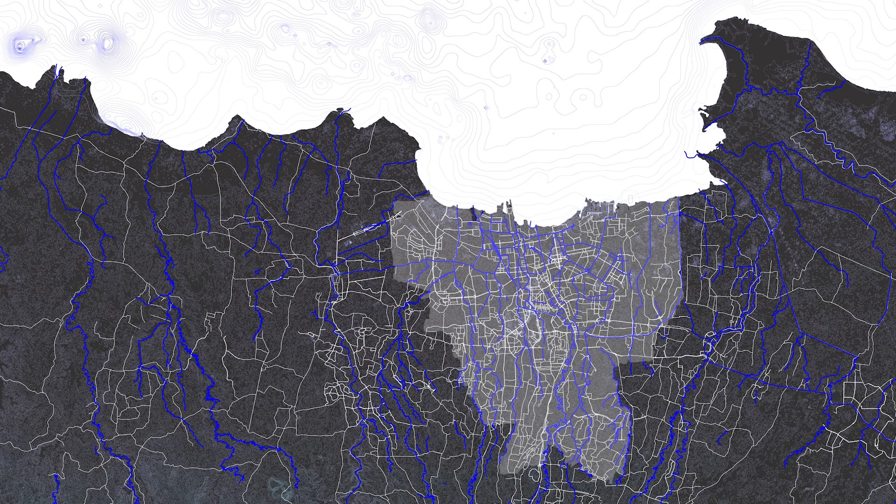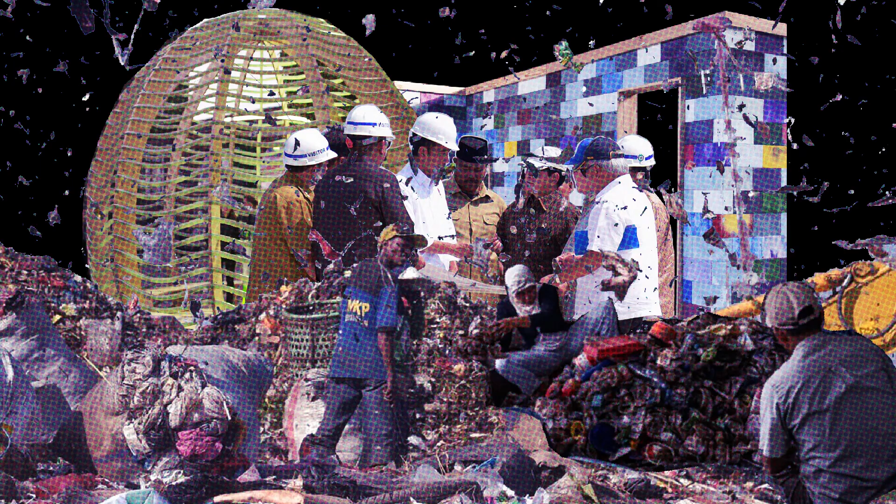Concurrently, the constant rising sea level has forced the government to move the sinking capital to the neighboring island of Borneo, leaving behind the most marginalized poor in the sinking capital. With millions of its residents in danger, the government has no choice but to accept the new proposal of building a new micro-city stemming from the old capital.

This micro-city is based on 4 ecosystems. Firstly, recycling as the main building block for the community, as well as its primary source of energy. Next, algae is used for the production of clean water and air. For food sustainability, aquaculture and hydroponics are used. Finally, the housing ecosystem, making it a livable society.

Using the distinctive layers of the existing city, a site analysis was performed to determine the suitability of different areas within the site. From this, the areas where the ecosystems are to be anchored onto were determined. These main anchor points are then used to generate a mesh that allows for flexible yet controlled growth of each ecosystem. The various elements are entirely connected, forming a closed-loop ecosystem, where the recycled waste is then used for building the main infrastructure system.

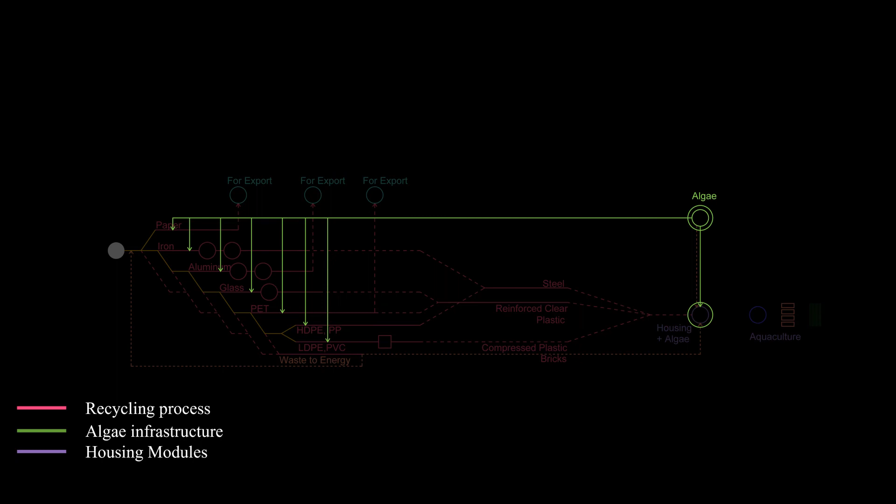The algae ecosystem acts as a mediating element as it cleans and processes the wastewater for daily use. The main recycling processes are represented in pink, forming the base of the ecosystem, leading to the yellow zones where the upcycling happens. The green represents the microalgae infrastructure for production of clean water and biofuel. The housing grid is located between each of these algae spines, where living spaces and aquaculture intertwine.

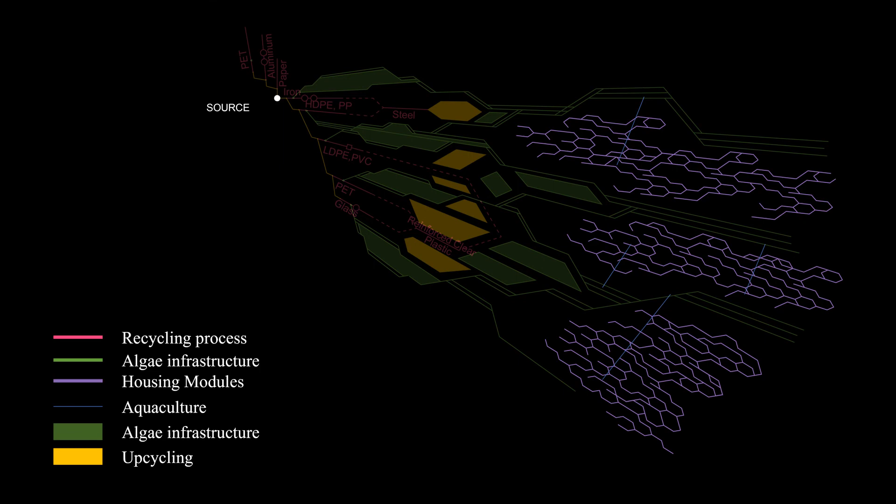2030. The capital has moved, leaving behind the poorest of the poor. In the first phase, the recycling facilities will be set up together with the microalgae infrastructure. This makes up the base groundwork for the community to grow.

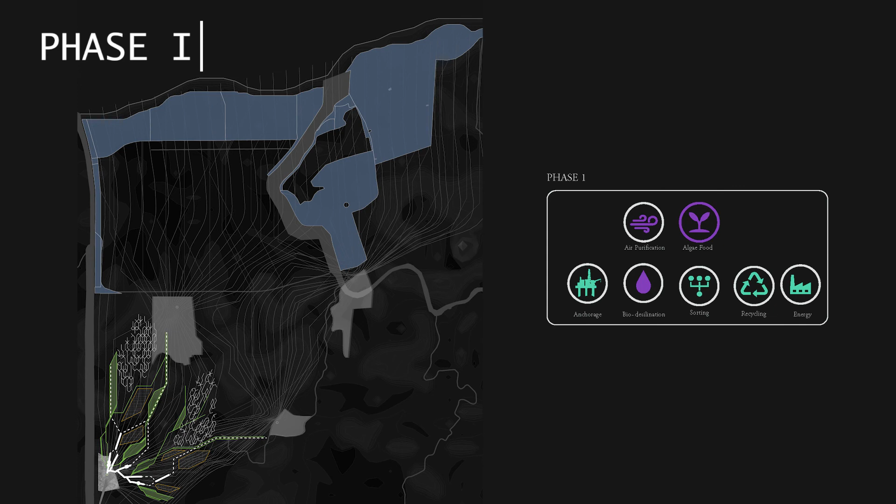Concurrently, the city will start to clear up areas closest to the coastlines as the threat of rising sea levels encroaches. The waste material generated within the area will be brought closer inland into 3 main waste consolidation zones.

2050. In the second phase, sea levels will begin creeping further inland, and the waste consolidation zones will start accumulating. New ecosystems will then start to grow from the waste consolidation zones. At the same time, areas within the vicinity will be torn down, generating resources for more communities to form.

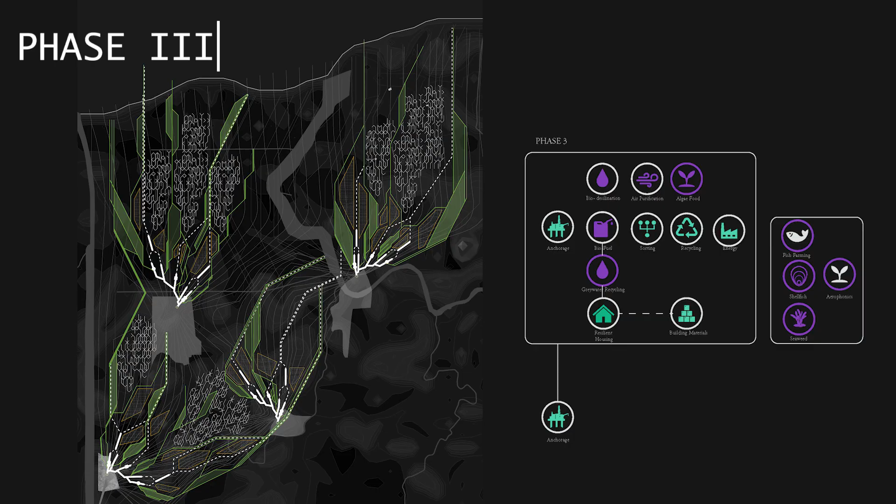2080. As more communities start to join, clusters will start to grow from the waste consolidation sites within this area. As the farming communities rejoin the housing clusters, aquaculture will thrive yet again.

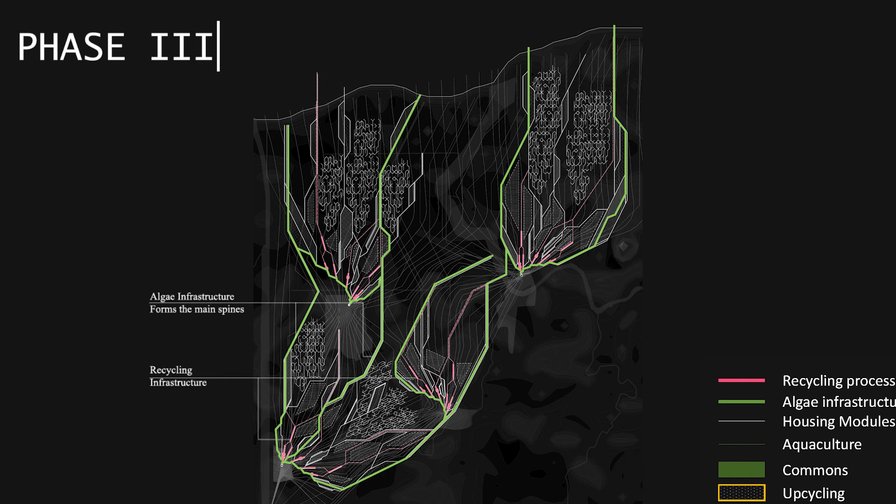Each of the communities will be further connected as the main algae infrastructure housing the commons continues growing. This algae infrastructure forms the main highways of connection within the site, steadily forming an interconnected network of different systems as the community starts reclaiming the area that has now been lost to the sea.

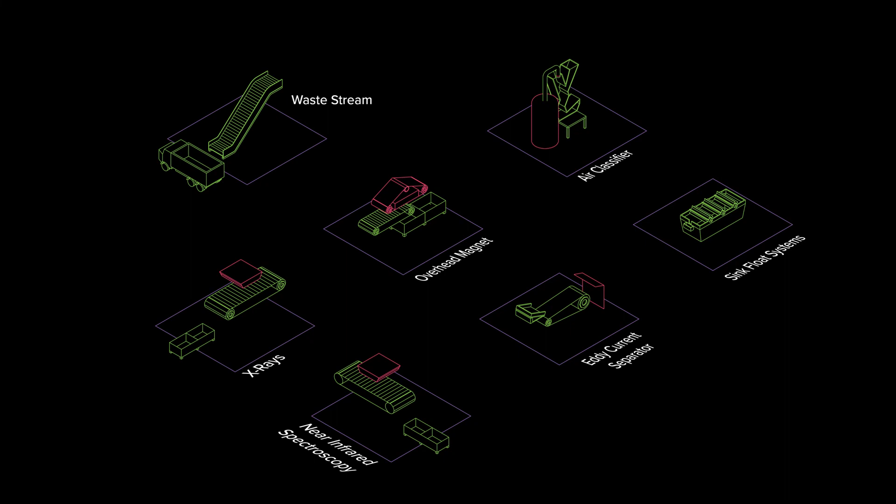Waste sorting. The heart of this project is the sorting process, where waste is sorted into its base components through sophisticated processes. These processes are strategically linked to allow for effective sorting of materials. A combination of sorting and recycling processes allow for the waste to be sorted and recycled into main components, ready to be used as raw materials.

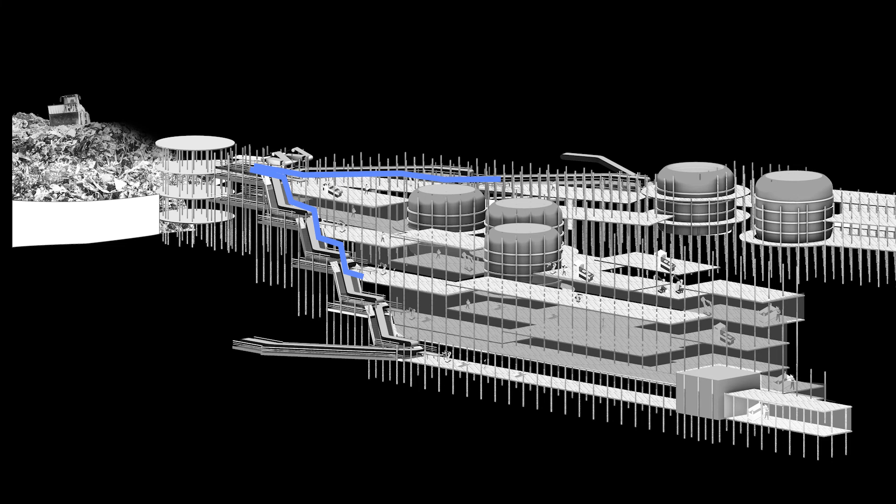This cascading infrastructure allows for the waste to be sorted efficiently, as they are directly channeled to the respective recycling systems, funneling the waste downstream.

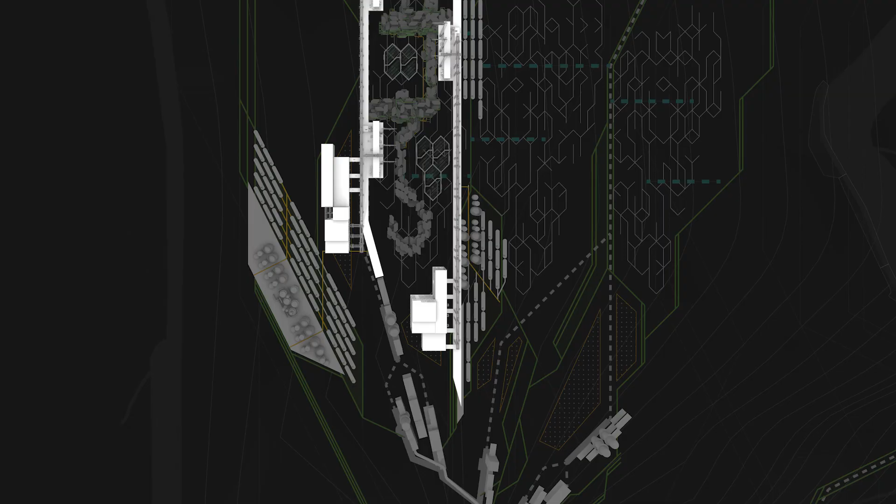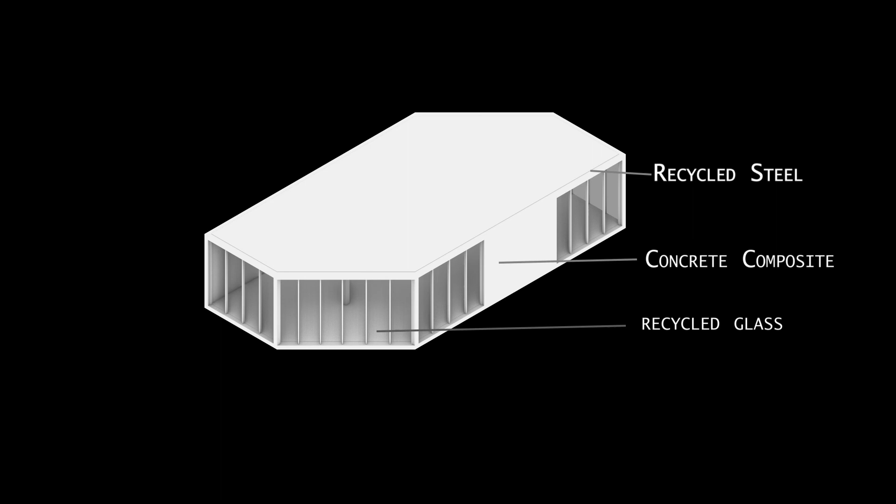Upcycling. The upcycling consists of three main upcycling plants: the steel upcycling plant, the glass upcycling plant, and the composite recycling plant. The materials made are then transported to temporary assemblage modules where base infrastructures are built. Each building block is made up of three predominant materials: the base structure made of concrete composite, recycled steel, and glass.

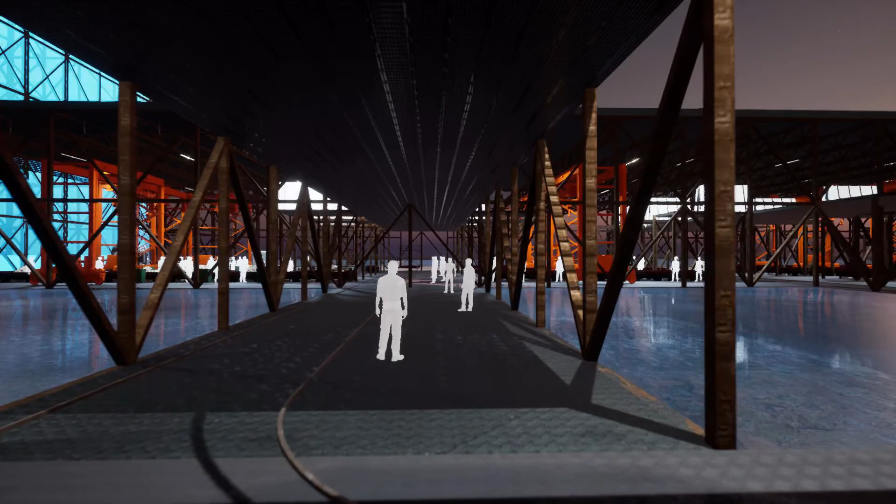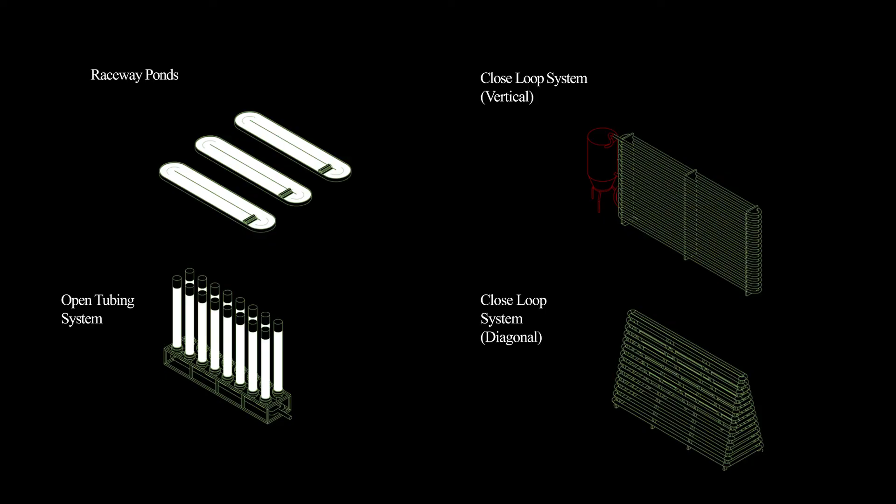Algae infrastructure. The algae infrastructure acts as a bridge between the productive systems and the living quarters. Different algae cultivation systems are deployed to cater to the specific needs within the ecosystem. The algae infrastructure consists of three fundamental systems.

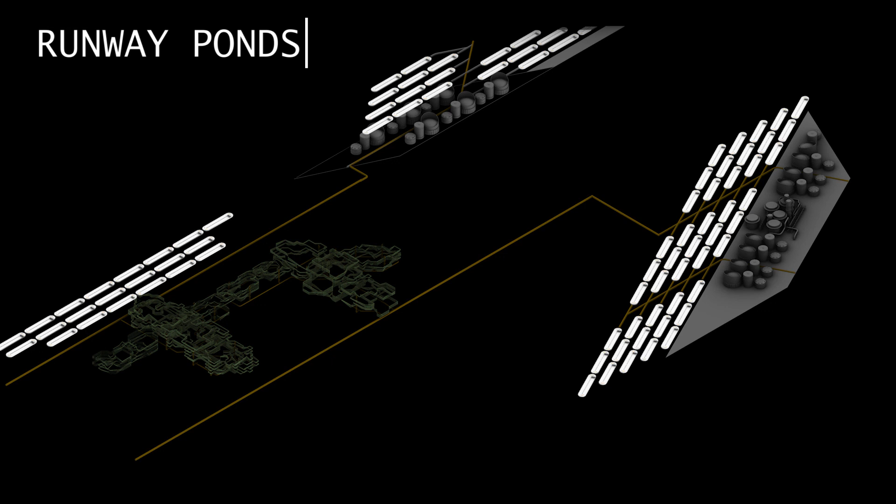1. The algae runway ponds. 2. The algae closed-loop system. 3. Algae processing system. The runway ponds serve as a base cultivation where seawater is desalinated to produce clean water for use within the productive system.

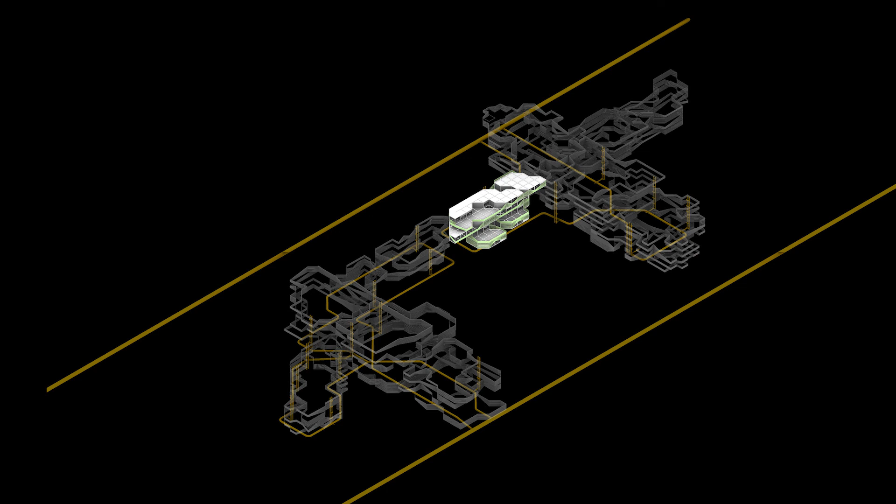The closed-loop algae system is designed based on the volumetric need of each living cluster, where all the loops are connected back into the main algae system. Each loop caters to one living cluster where grey water collected will be processed by the microalgae before it is reintroduced. All the different systems are linked together through the processing plants.

Each processing plant houses a research center where algae technology is researched and developed. One example is the upcycling of byproducts in the cosmetic industry.

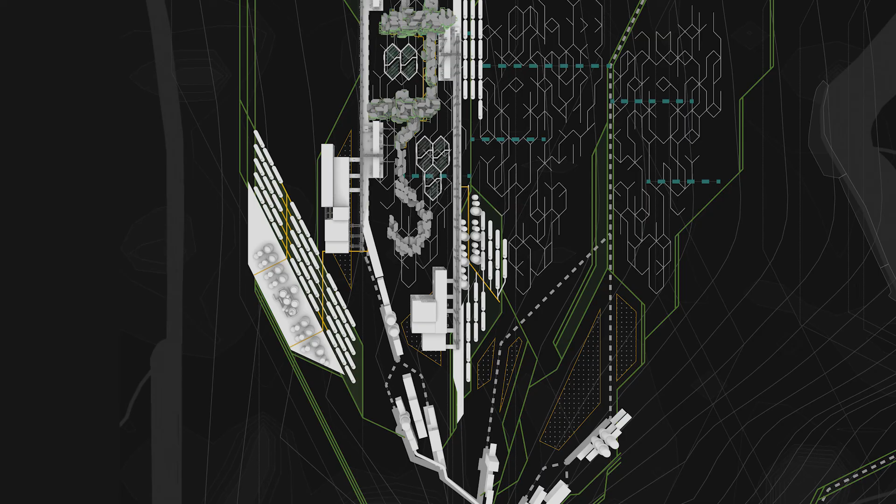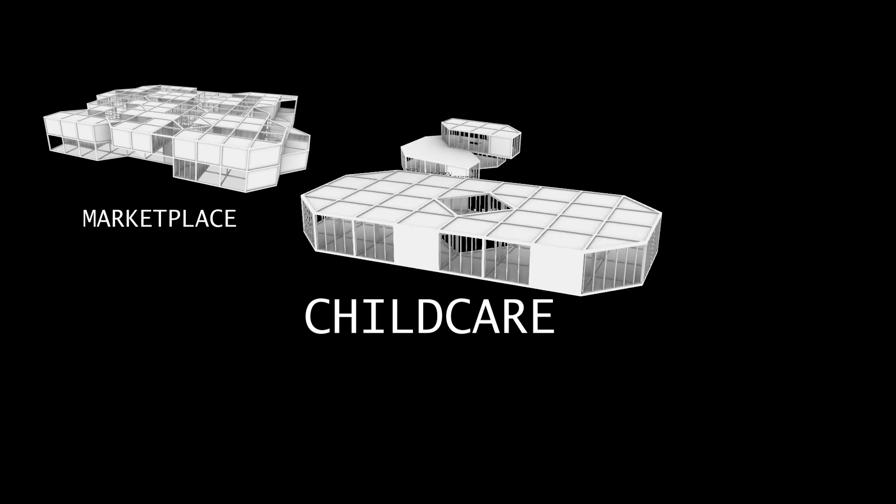Commons. The Commons are made up of 5 programs: the Marketplace, forming the base of the Commons; the Learning Labs, where residents can learn more about different recycling processes and the algae infrastructure; childcares, clinics, and entertainment centers make up the remaining 3 programs. Within the Marketplace at the base, the Commons are agglomerated, catering to the growing need of the community. The Commons also serve as a bridge between the productive spine and the housing modules.

Let's take a closer look into the Marketplace.

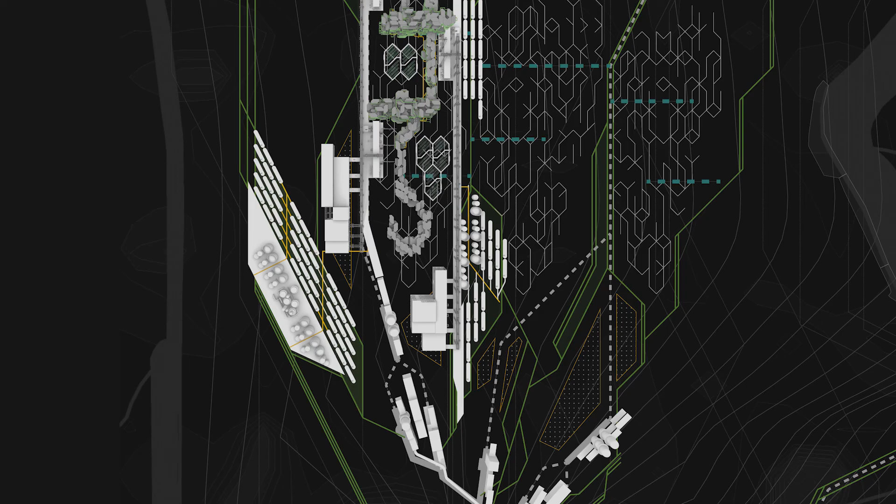Housing. There are 8 different housing configurations, catering to different types of family. A range of different housing typology, from studio apartments for transient workers to larger apartments catering towards bigger families. The housing grows from the commons as more people move into the safe haven of this new microcity.

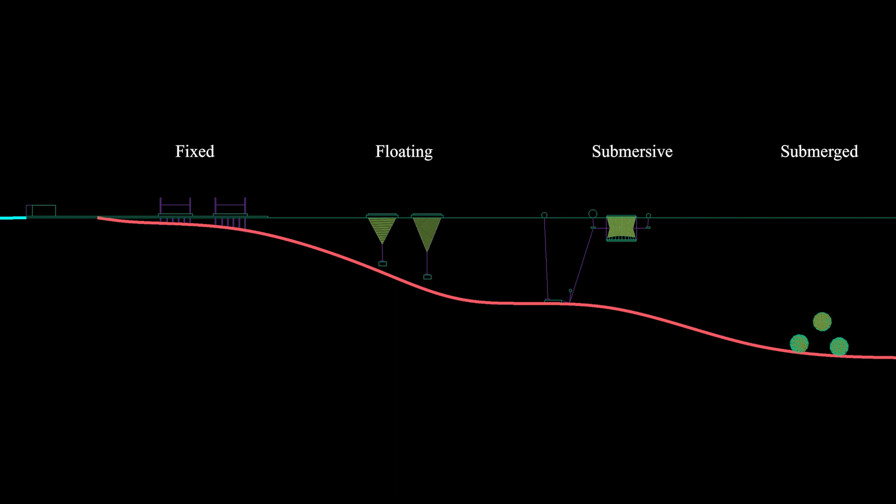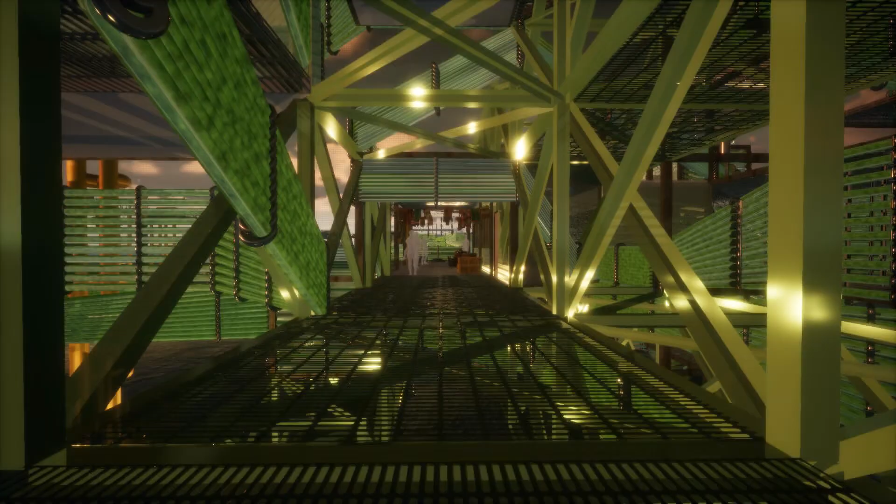Within the enclave of the housing infrastructure, the algae infrastructure also acts as a second skin, controlling the amount of light let into the house. Aquaculture is practiced. Through the analysis of diverse aquaculture systems, seaweeds and mussel cultivation were chosen due to their suitability in shallow seawater. The aquaculture modules allow the community to cultivate their own food, allowing them to be self-sustainable. Let's take a look into how people are living within the community.